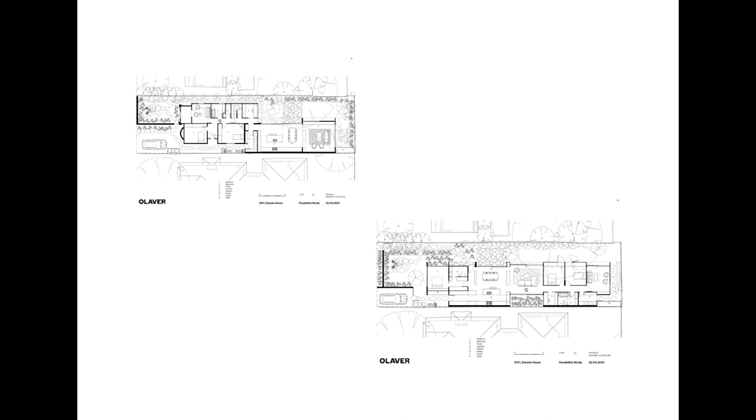We also looked at a new build, which was an elongated plan that really pushed everything to face north. We thought this could have been a really good resolution of the brief. However, it wasn't ticking the box in terms of them wanting to be really connected, so it was really spreading out across the site.

So the other option which we looked at, which we felt was the right way from the beginning, but sometimes you need to present other things to get to the right answer, was a courtyard house. At first I was doing my best Roy Grounds impression, but realised that that didn't work, so pushed the courtyard to the north of the building.

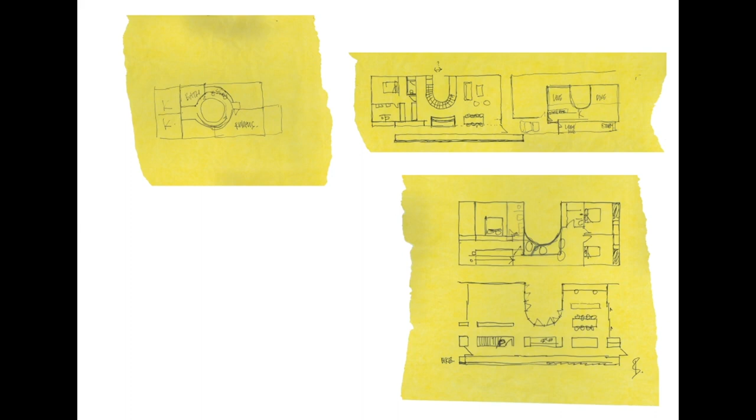And this is actually the plan that we presented at feasibility, and it really didn't change very much from this, so I'll just run through this briefly. The entry is to the west of the site up there, living room, then the courtyard is after that. There's a little reading nook which is actually under the stair, so the stair was located towards the centre in the final plan. Kitchen, dining and study, and then below the kitchen there's the butler's pantry and the laundry

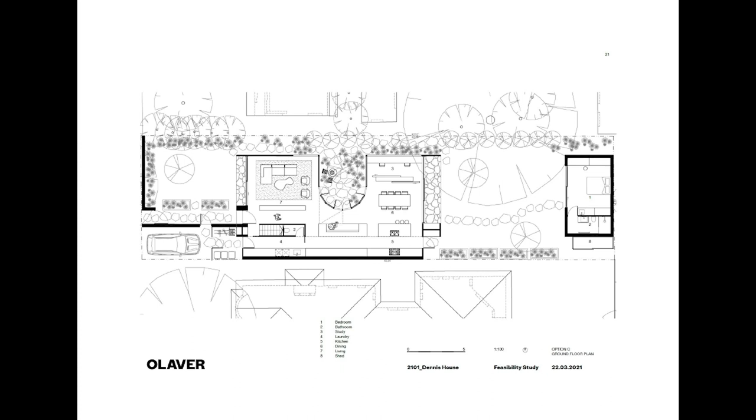and a little toilet underneath the first floor above. A little studio to the rear. And then upstairs there's a landing space which is actually open in the final plan, which forms a bit of a rumpus room, a bathroom, two kids' bedrooms, and the master suite over to the west.

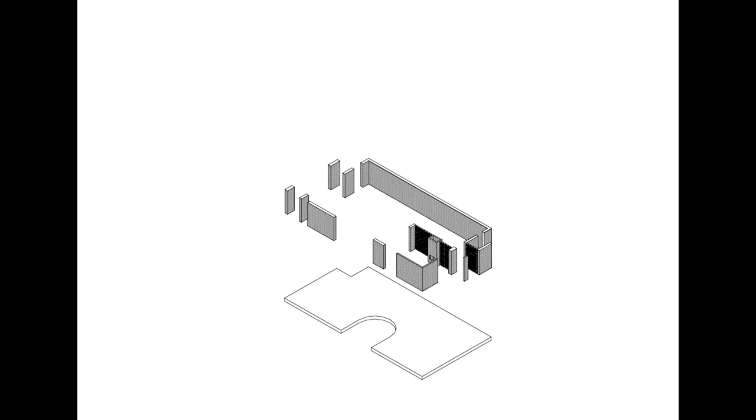The house is on an insulated, hydronically heated concrete slab. We've used recycled brick for most of the external walls on the ground floor, and then the rest of the structure is CLT. So these are CLT walls on the ground floor, a CLT stair. The entire first floor is constructed of CLT, and there's a CLT roof.

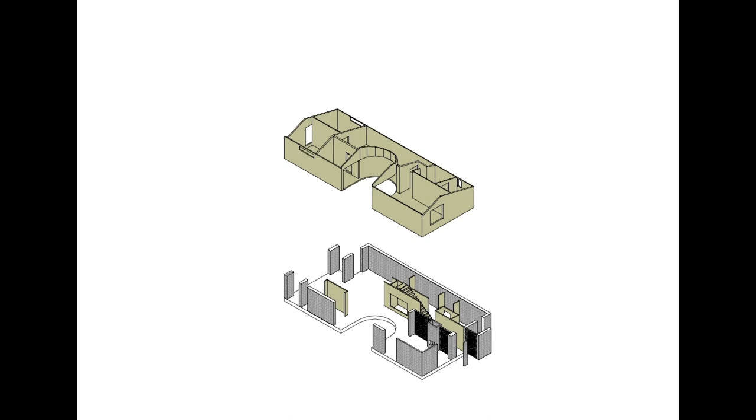There's one steel member in the whole project, which is a lintel, which you can't see there over the rear sliding doors. We really tried to eliminate steel entirely, but didn't quite get there, unfortunately. I think it was over-engineered.

The why CLT? So this was designed during COVID, and there were the issues, obviously, with procurement. There were issues with material costs going up massively. And sustainability was a strong driver. So we had sort of heard about CLT, understood what CLT was, but had never had the chance to explore it. So I actually gave XLAM a call and asked them what they were seeing in the market, and they said that their costing on their material was not going up and that they didn't foresee any issues with their supply. So we put it to the client quite early on.

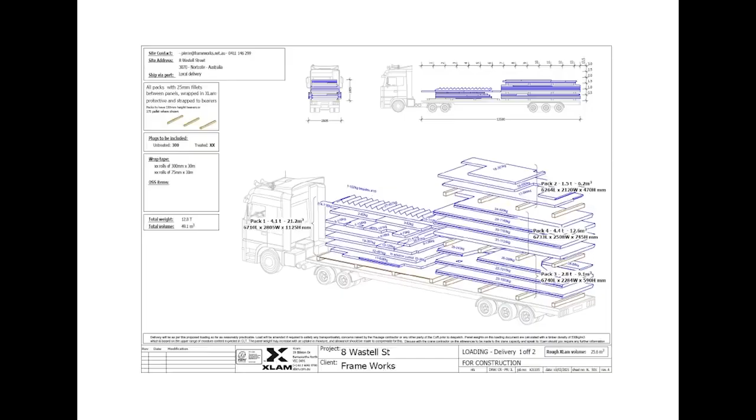In the timeline, you would have seen that that previous feasibility study was in March, and this is a month later, and we've pushed CLT and we ran with it. So it was a huge learning process for us. We spoke a lot with different subcontractors, suppliers, consultants to work out how it was done. And they said, you just chuck it on a truck and drop it off, and that seemed pretty good.

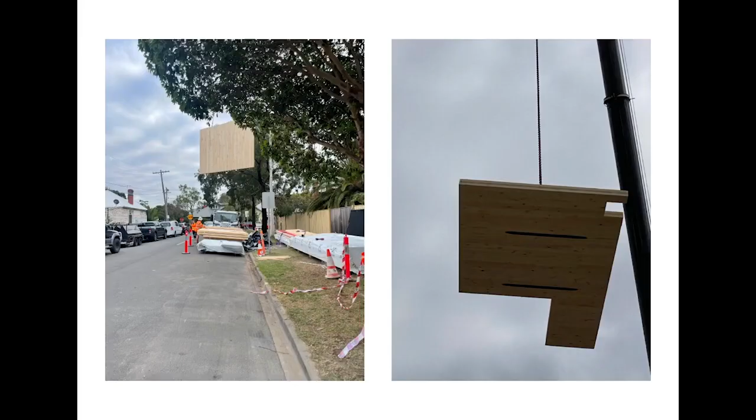So there it is. Craned onto site, I was just amazed seeing this thing turn into a house within the space of a week. We enjoyed a few beers there once the roof was on. And it really is amazing to see the difference this has between a typical traditionally framed structure. It just felt dense and solid from before even windows were on. So it's a beautiful thing.

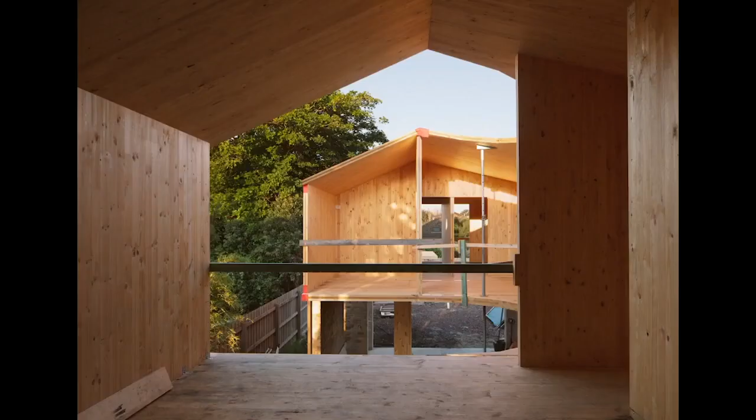Going on to the house more in its entirety, so we present a sort of typological, pretty normal gable roofed form. We were trying to mediate that two-storey studio that I mentioned earlier to the north and the existing Californian bungalow to the south. This facade is west facing, so we've got externally operated blinds over both the windows on the west facing facade.